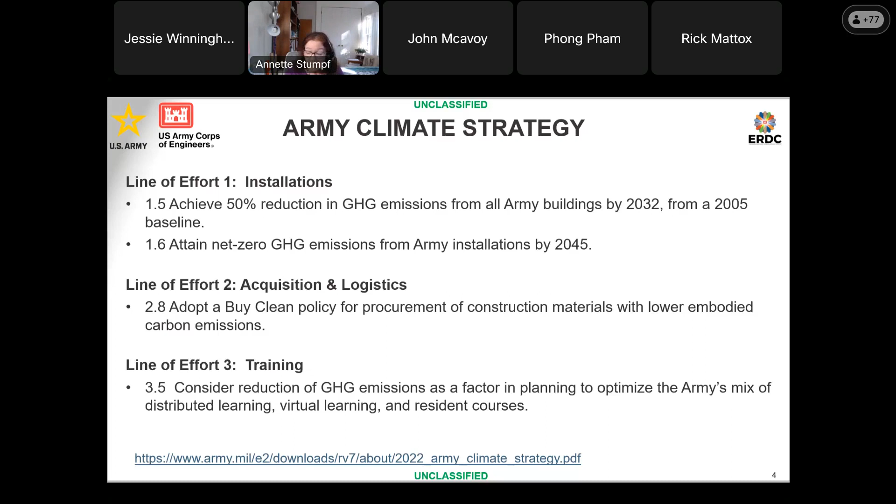So the Army Climate Strategy Implementation Plan—we're really working on developing a roadmap on how to incorporate sustainable building materials and engineering with nature tools and techniques in the MILCON planning and design processes, and to adopt the Army Buy Clean policy. The federal Buy Clean policy has 4 materials. They talk about concrete, asphalt, flat glass, and steel.

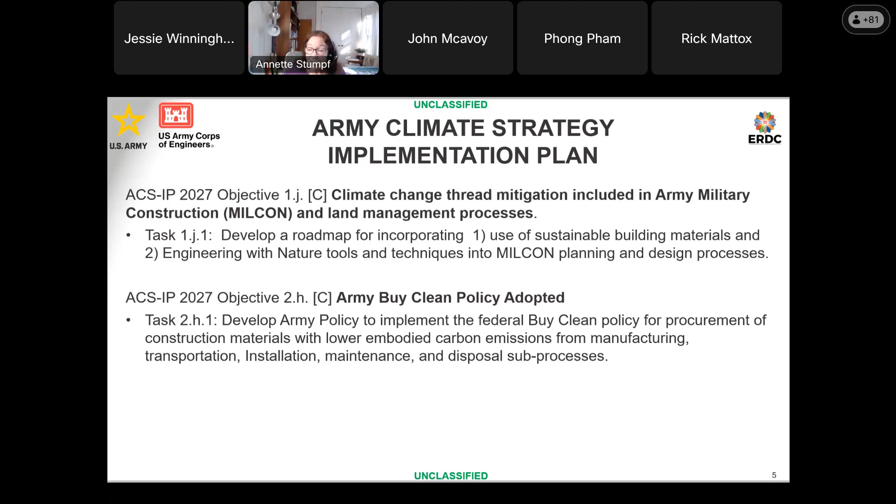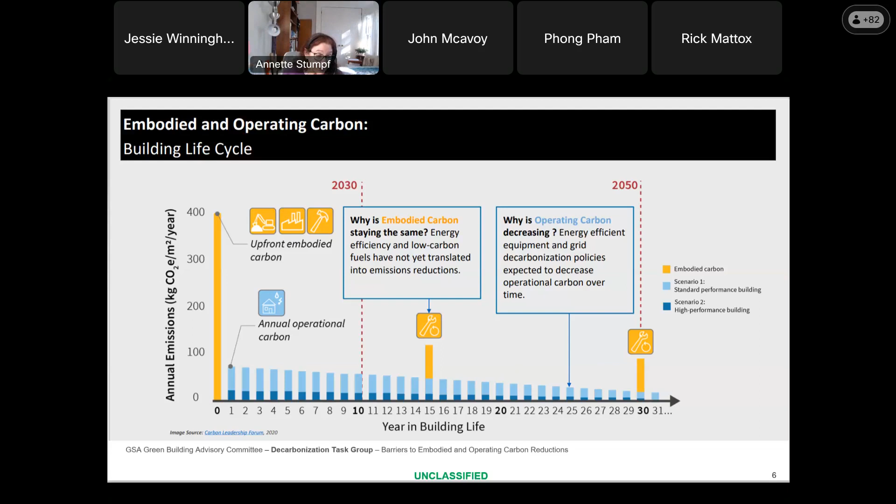The exciting part of this is it's such a big focus that we were able to develop a big research effort and get funding to get ERDC researchers together to plan out a project to help the Army, the Corps, and DoD actually figure out how to reduce embodied carbon of our materials. So right now there's several pilot projects going on. You've probably heard of the NDAA pilots. There's an example at the end of this briefing for the JBLM net zero pilot. There's some OSD pilots for net zero projects, and there's a big effort to modernize all the guidance involved in this.

Implement EPD, which is Environmental Product Declaration, and Allie's going to talk about that.

We're looking at, this is research term, leveraging high TRL technologies. That's technology readiness level, something that's ready to go now, proven enough that we can incorporate it into our projects. And really figuring out how do we benchmark what we're doing, what are we doing now, and how do we get better, and how do we show that we've actually gotten better.

So that's today's effort. In 5 years, we expect to be a lot farther along and be able to reduce the global warming potential of the materials and construction technologies we are using in our projects, and have a lot better guidance so everybody can do this easier with their jobs.

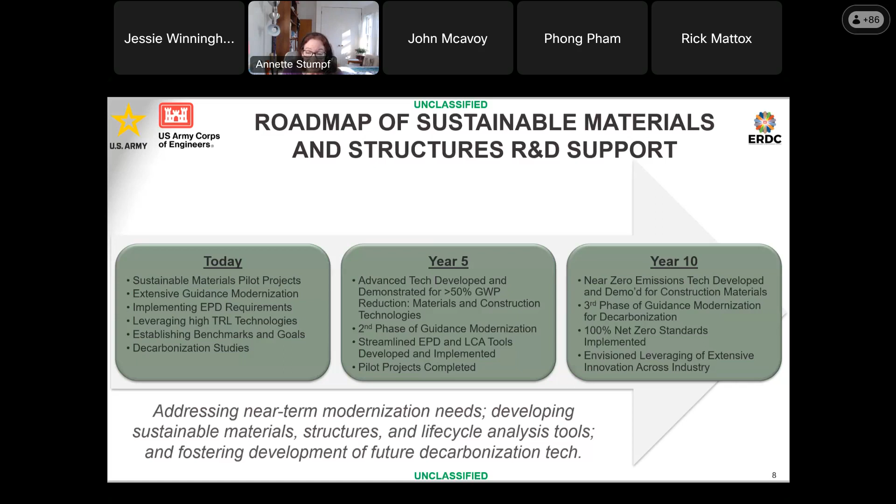And the pilot projects will be completed, so we'll see how well we actually did. Then future on, there's always work to be done. So there's going to be a new generation of materials and guidance and net zero standards. How do we build these buildings that don't use any fossil fuels? So this is a big effort.

And this project is a 4-year effort, and we have a lot of people involved. Allie's going to talk about more details, but we're able to work with our peers in the other ERDC labs who are experts in concrete and asphalt and mass timber or bio-based products, so that we can really take the research in the materials and figure out how to translate it to something that we can use in the design and construction process.

And this should also work for civil works projects or projects you have at an Army base or a military base. If you need to repair a building or replace pavement, we should be able to use these modernized specs to really reduce the carbon footprint.

So Allie's going to talk about this part of it. Yeah, so the project that we're involved in is the mitigation of greenhouse gas emissions for DoD construction materials and infrastructure. And there are 6 main tasks within this whole project.

So the first task is primarily focused on the partnerships and stakeholder engagement. And this includes talking to the other services, other government agencies, academia, and industry. The second task is the lifecycle analytics, and I'm going to get into more of that in the next slide. So we'll skip over that right now.

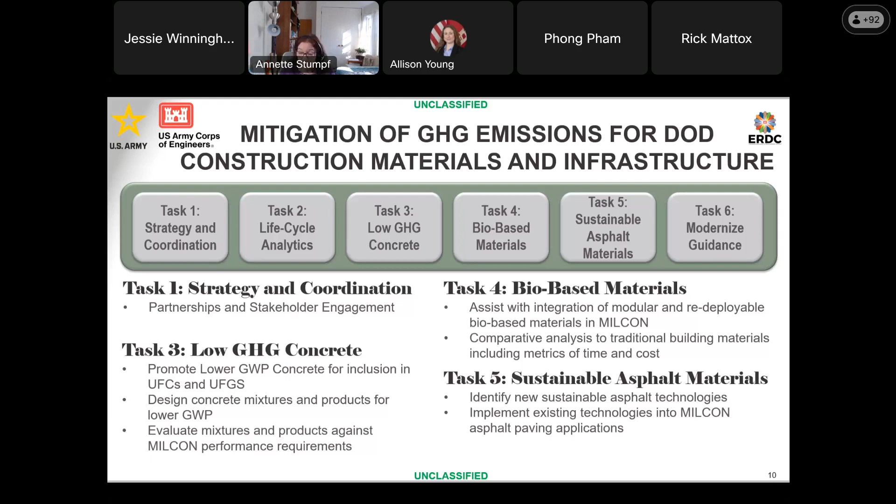Next slide. Sally, I know you got locked up there, but okay. We're on slide 11, okay.

So task 2 is the lifecycle analytics. Primarily we're focused on LCAs, or the lifecycle assessment, which is evaluating the environmental impacts of the materials and products that we use in our buildings. It can be used for other things as well, but obviously we're focused right now on construction materials.

So what we've been doing this past year with LCAs is looking at all the tools that are out there. There's a lot of commercial off-the-shelf tools available, and we're trying to get as much information from them as possible. We're doing an evaluation to determine which of these tools we're actually going to demonstrate in the next couple of years, with the purpose of figuring out what tools might be useful for Army and DoD use.

Some of the criteria we're looking at for the evaluation purposes are the user experience. How much expertise will be needed to use these tools? Will it just be anybody, or do we have to have specially trained people to use these? Also the workflow or integration into current design processes—does it integrate with BIM models, for example?

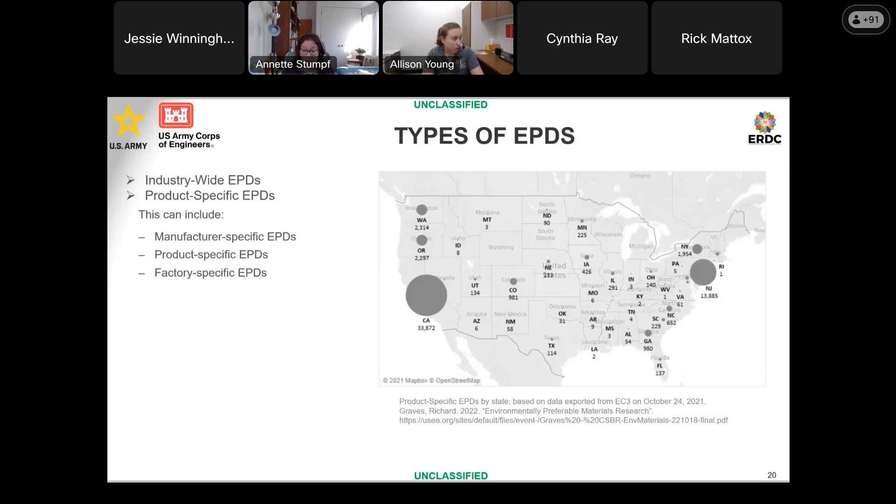Product-specific EPDs represent a specific product by a single manufacturer, and factory-specific EPDs represent a specific product produced at a single facility by a single manufacturer. This graphic shows that in 2021, there were nearly 60,000 product-specific EPDs in the US, which sounds like a lot, but considering how many products are out there, I think we've got a ways to go.

It's important to understand how these EPDs can be used. They can be used to understand environmental impacts, used as a data source. Ideally, we want to use EPDs for comparing, but not all EPDs can be compared to each other.

EPDs must follow the same PCR to be considered for comparison, and even then there might be issues comparing across those EPDs, depending on factors such as the quality and consistency of the data inputs. The other thing with comparing is, ideally, if we can't compare EPDs to each other, is there a way to compare to baselines? There are some issues with that, which I'll get to in a few minutes, but that's another option we're looking at.

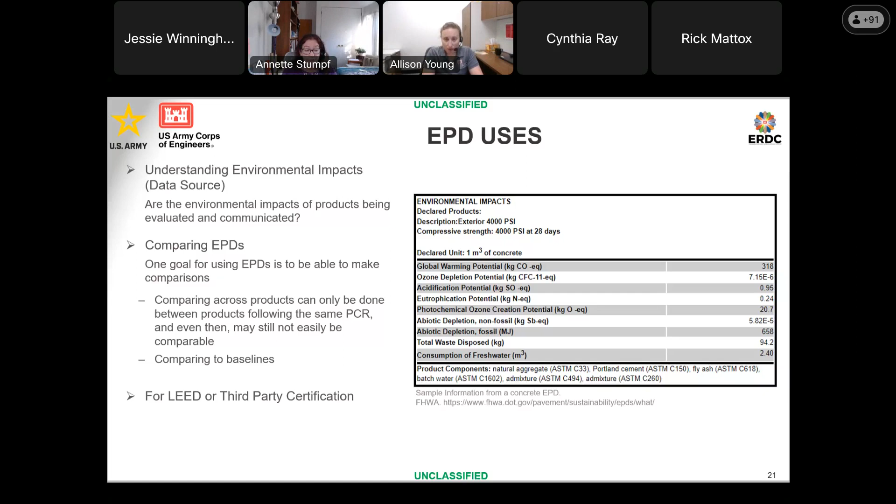And then finally, for LEED or third-party certification.

Getting further into the LEED credits, LEED has a credit for conducting whole building life cycle assessment. This looks beyond one product at the system of products in a building, and can specifically look at structure and envelope.

More closely related to our topic today is the Building Product Disclosure and Optimization Environmental Product Declarations credit. This credit requires multiple products from multiple manufacturers with EPDs.

These EPDs can be used for products with publicly available, critically reviewed LCAs conforming to ISO 14044, products with product-specific Type 3 EPDs that have been internally reviewed, products with an industry-wide Type 3 EPD, and products with product-specific Type 3 EPDs that have been third-party certified, which are the best—they're worth a little bit more in points.

The pilot credit for procurement of low-carbon construction materials requires a baseline calculation and a secondary calculation showing the reduction in embodied carbon intensity by using lower embodied carbon materials. You can look at USGBC's website to get more detail on these credits.

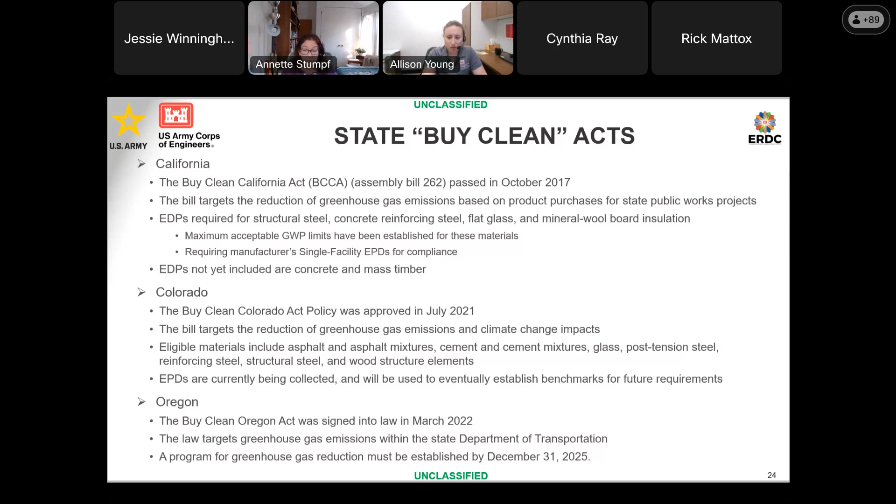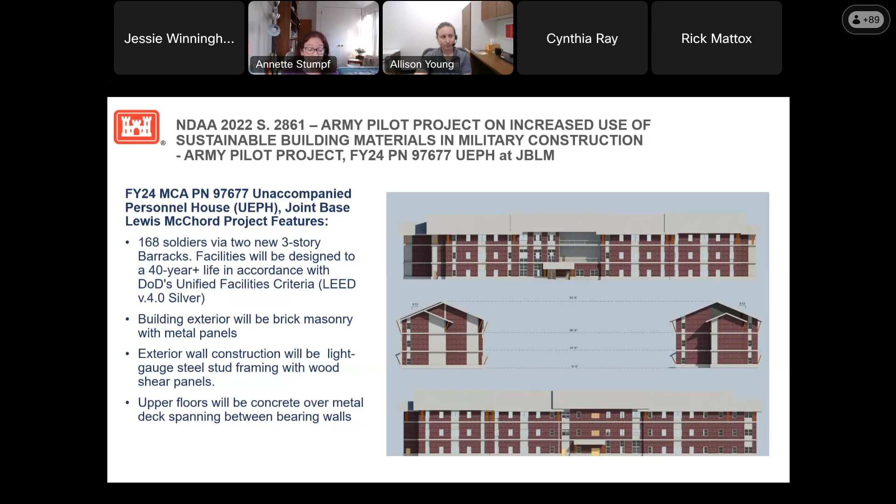So once you start looking around for lower carbon materials, there's a lot of training materials and examples you can look at. And actually Portland and Seattle is a hotbed for great sustainable materials. They're doing a great job out there.

So they were able to, with the ERDC team and everybody working together, modify 9 specs to make the materials more sustainable. They're looking at EPDs, emissions, performance requirements. You know, you want a material that actually is resilient, is going to last, it's durable, it performs well.

You don't want to just pick a material that's lower carbon that's not going to work for your project. So you have to really evaluate those, and you have to look at the cost and other submittals, you know, delivery. That all has to work with your project. So there's an effort now to update or suggest updates to UFGSs, and they used the Carbon Leadership Forum 2021 materials baseline as low emission targets.

So the concrete and steel, you can see details here. The concrete, they're looking at 50% better than the baseline. A baseline is average concrete you can get. Trying to get 40% better than the GSA standards, 30% better than the Carbon Leadership Forum low targets.

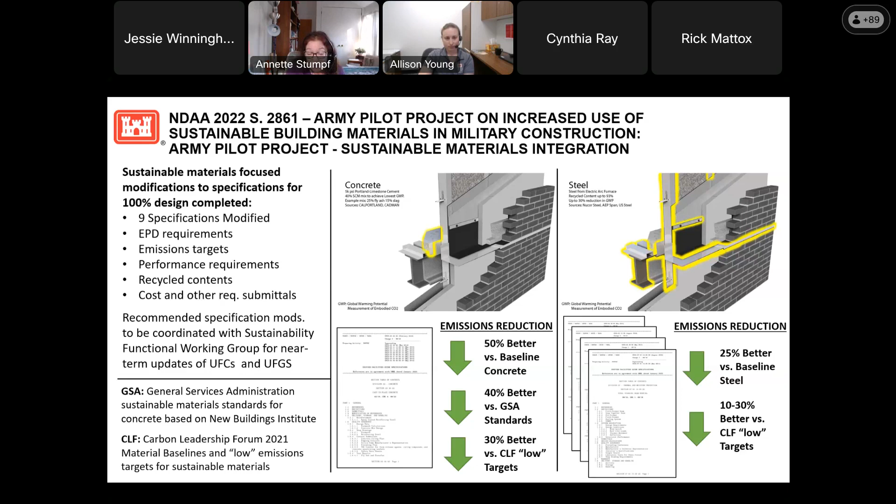So they looked at the wall sections. They reduced the emissions of the brick wall by reducing the quantity by 30%. And they looked at the insulation too. So all these specs were modified.

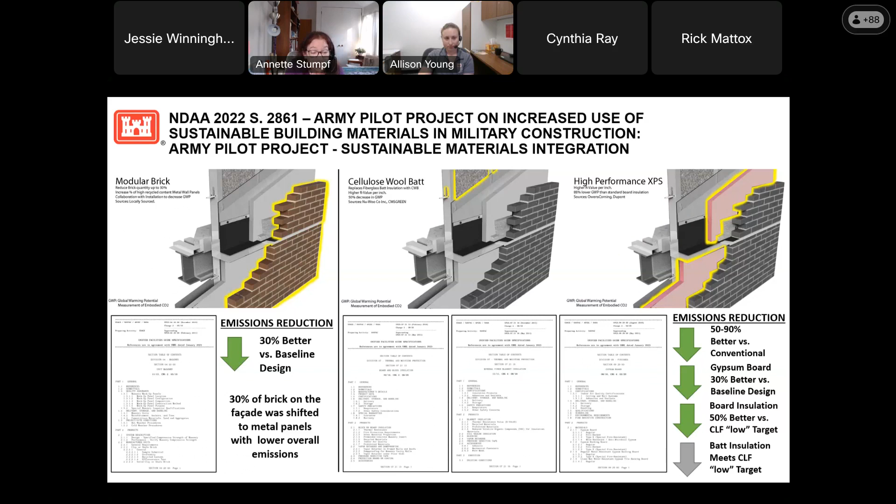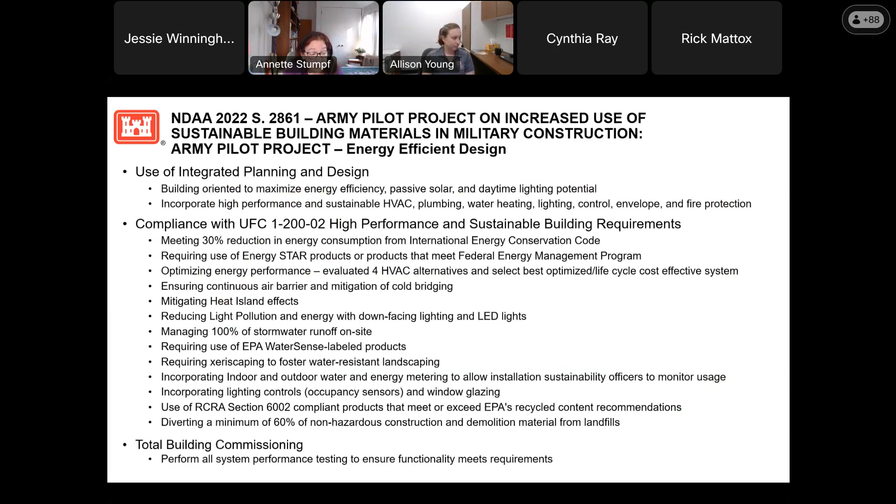And they did a lot of work with the integrated planning and design process. These are all the details of how they complied with the UFC high performance sustainable building requirements. I'm not going to go through all these. They're looking at all the LEED credits, of course. Goal to achieve LEED silver.

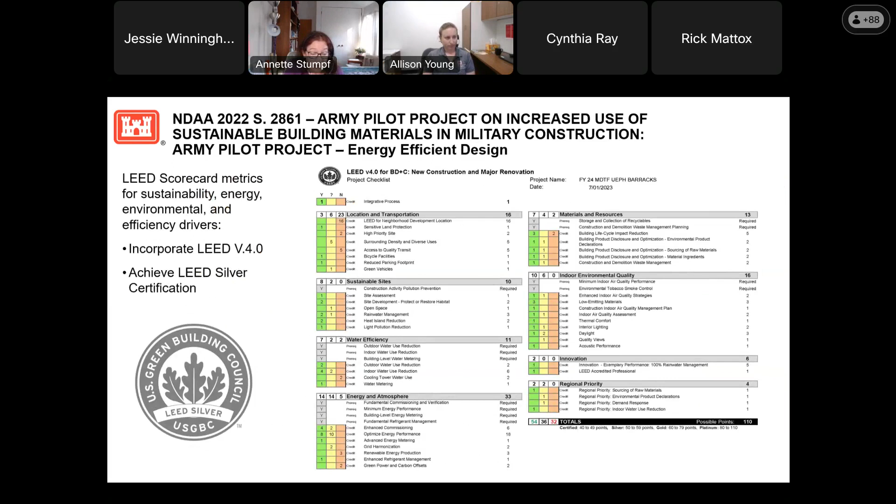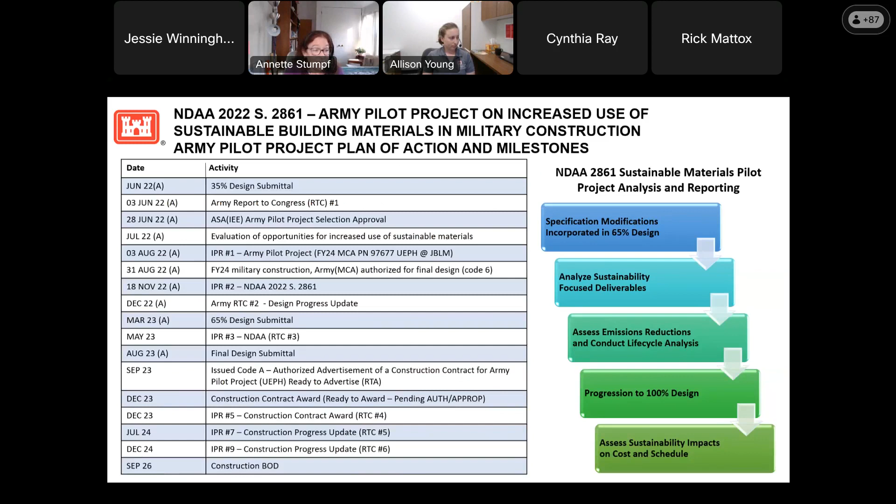And the schedule, they're on schedule. If I remember correctly, there's probably someone on the call that's part of this project. I think they put the project out for bids and they've received some bids, but that's where they are right now. So they've done a good job of staying on schedule too. And this is a very high visibility project, as you can imagine.

So we went through this kind of quickly. We have some questions, I know you have questions too, but we're really looking to hear from people that have tried to earn the LEED LCA credits or the EPD credits. Have you tried to do a life cycle assessment? Have you used Athena or any of the other tools?

Have you collected any EPDs? Our names are on the next slide so that you could send us information, we're happy to talk to you. We want to hear your problems, your successes, because we're trying to figure out how to make this work for the Corps. Now, how do we make this process, that's right now pretty cumbersome, how do we make this actually work?